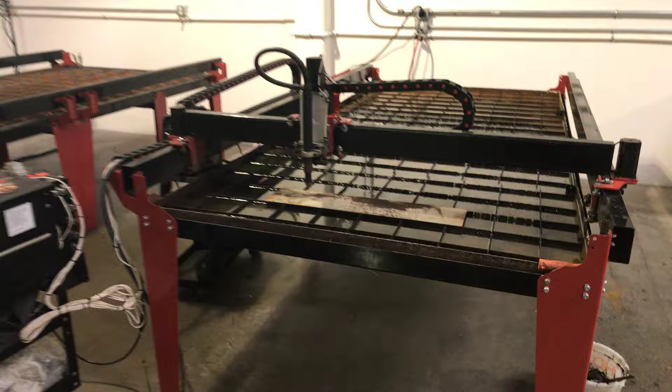All right, so it seems we're having a little bit of trouble cutting some 3/8 plates. So let's talk a little bit about the necessary steps to make sure everything is working correctly on that. Now, I'm working with the 45 XP right now, and right now I have a fine cutting head on here. The fine cutting head looks like this here, right here.

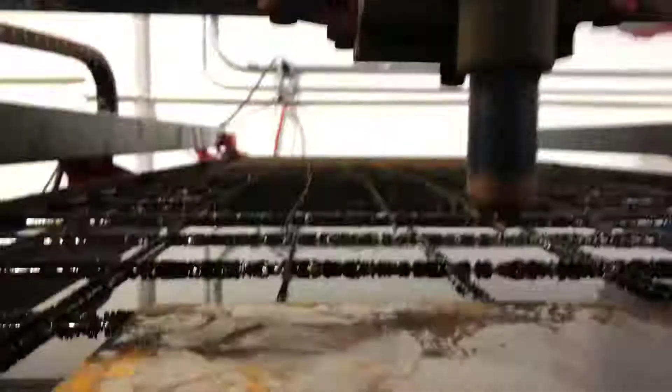This head won't be useful for cutting 3/8. 3/8 exceeds the capacity of this type of head. What we use here for that is, of course, going to be the traditional shielded consumable, the consumable shield with those consumables. But let's talk about what's going to be necessary to cut out those parts.

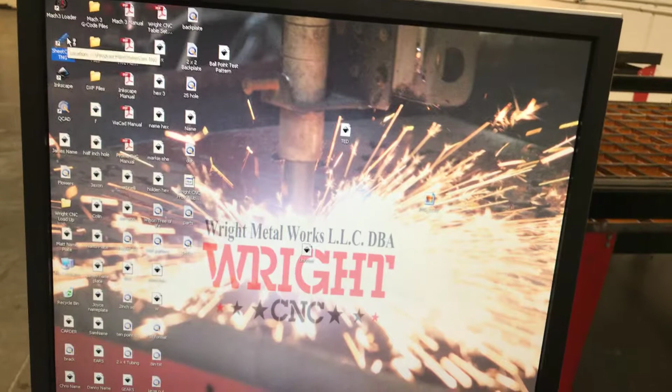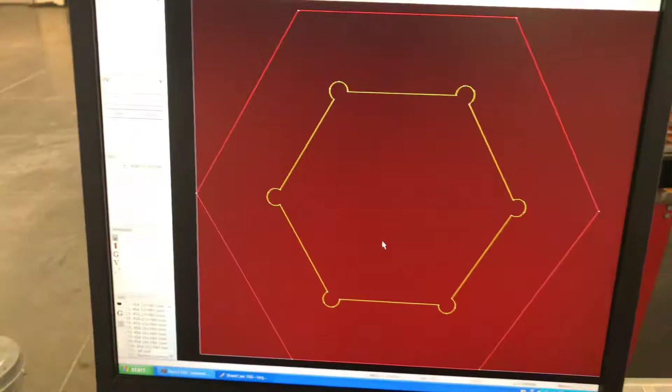If we're cutting the same files as we did last time, or if we're using the same G code, we're going to run into this problem, and I want to make sure that we don't. So I'm going to open up SheetCam. Now in SheetCam, no, we're not going to load it. I'm going to go File, New Part, and we're just going to go with Desktop. We're just going to go with this one. All right. So this is a large bracket.

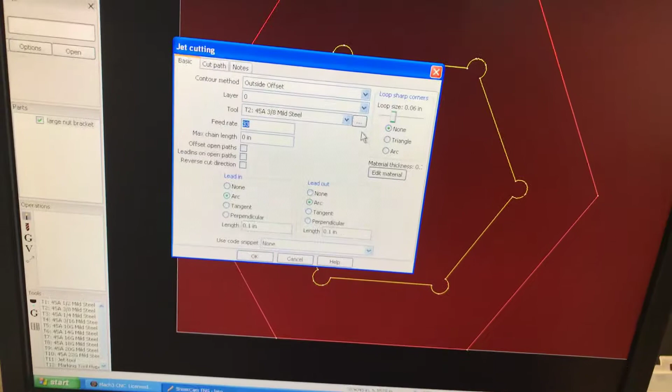While I'm working with this, I will go up to Operation Plasma Cut, and I'm going to set this to my 3/8 settings here. But what I tend to do, since this is approaching the upper range of a 45 XP, I'll actually take this down to somewhere like 30 or 29 inches a minute, which is going to give us a cleaner cut through, because the slower we cut, the more accurate and clean those cuts are going to be, particularly on bolt holes. So I'm going to drop this down to 29 inches a minute.

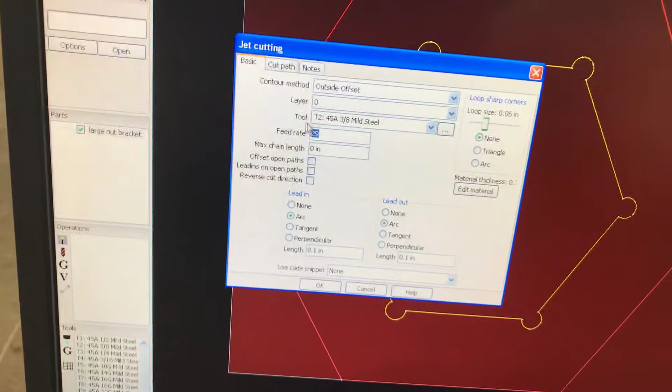My lead in and lead out have to be at least the thickness of the material. So I'm actually going to make this 0.425. In this case, it's over the target, but it gives us enough room to make sure that we are safely cutting out these parts. Again, I have my tool selected, 3/8, feed rate 29 inches a minute. I hit open, I hit OK, and I have my part there, and it's all ready to cut.

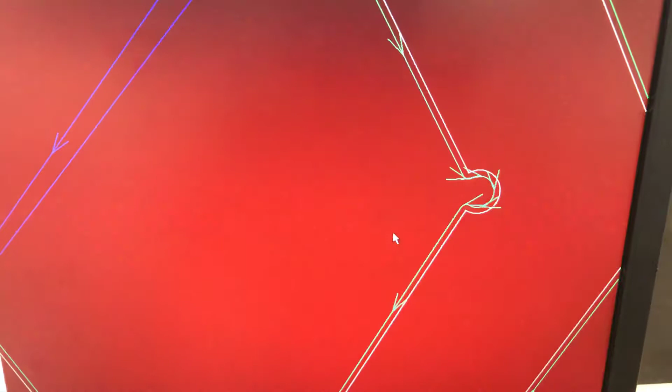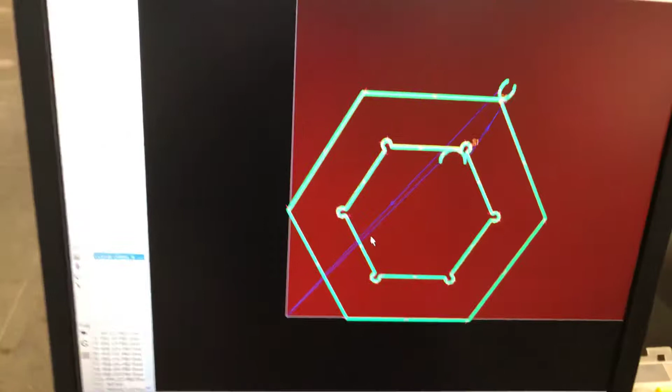Now, typically there'd be a green border that shows up. I'm not running that with the green border. I am showing the cut path here, and we can see that there. Looks good to me. Let's go ahead and make this cut. So I'm just going to go File, Run Post Processor. We're just going to go and replace that. So that should be good to cut on 3/8, but I just want to make sure that we have our tool settings set under 30 inches a minute on SheetCam in order to make sure that we are cutting all the way through the part.

And at this point, you'll also probably want to adjust your THC. Make sure that as it's cutting, that torch head remains 1/16 of an inch off the material. We want it real close. Now, this is, of course, with this consumable here, but we want that thing barely riding above the material in order to make sure that we are getting the cleanest cut through the plate. So I would watch for that as you're working with the 3/8 plate.

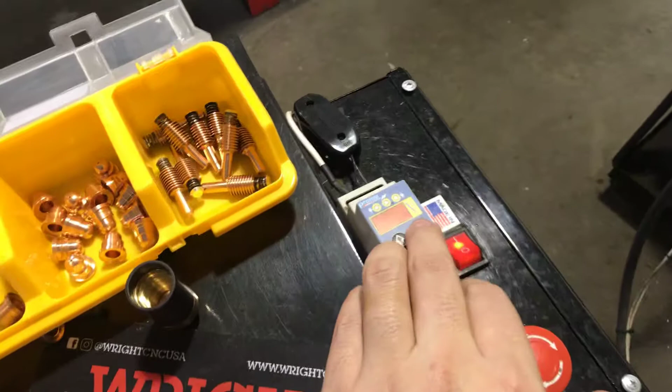You may run into the fact that it may be trying to cut too high because of the THC setting. The THC, of course, regulates the torch height, and you may find that the torch is raising up off the material. If that's the case, all we have to do is hit the down button here, or the up button on the THC while it's running.